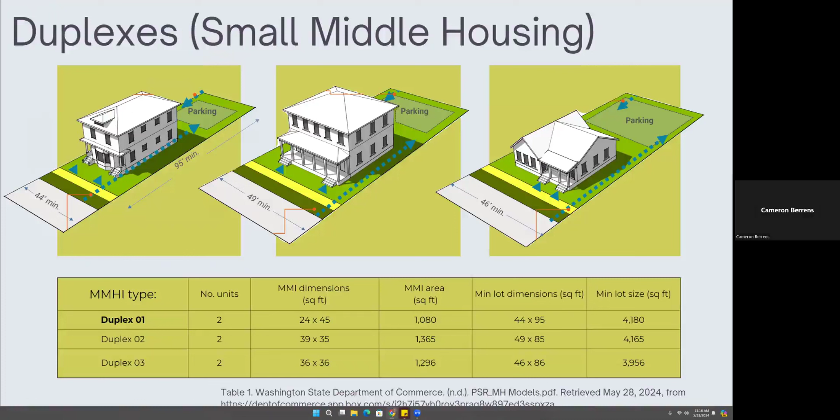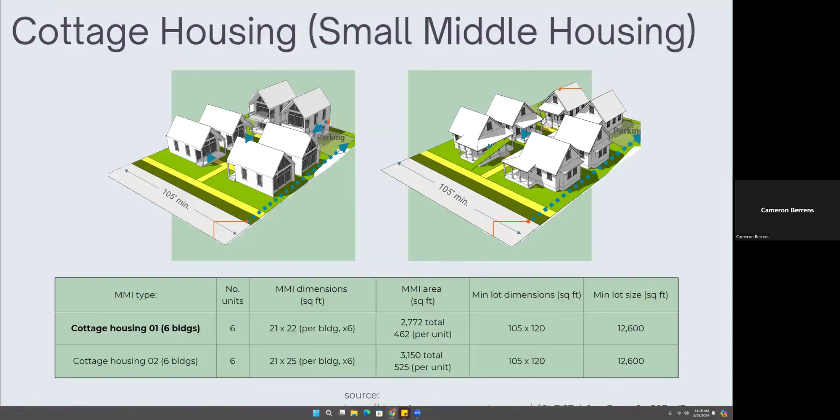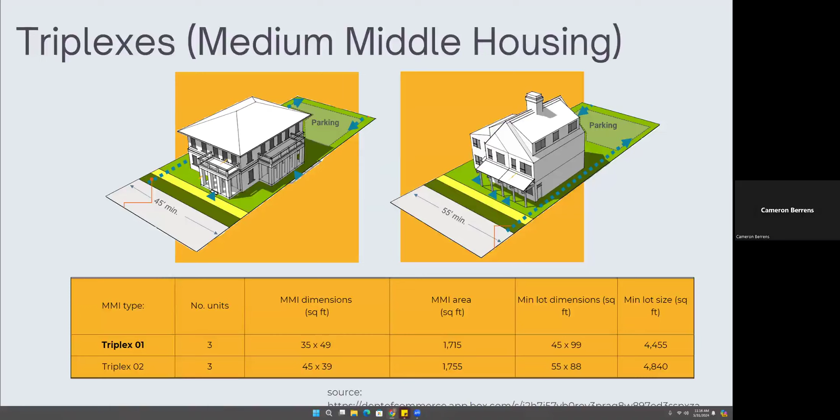We have cottage housing, which is usually a group of 6 or so homes, all on one lot. They are smaller buildings and are typically 1.5 stories tall and are arranged in this sort of style to allow for an inner courtyard. We have triplexes, which are 3 units side by side in a house-scaled building, but sometimes on the upper echelon of house size. These are 2.5 stories tall usually, so still within the Pacific County height limit.

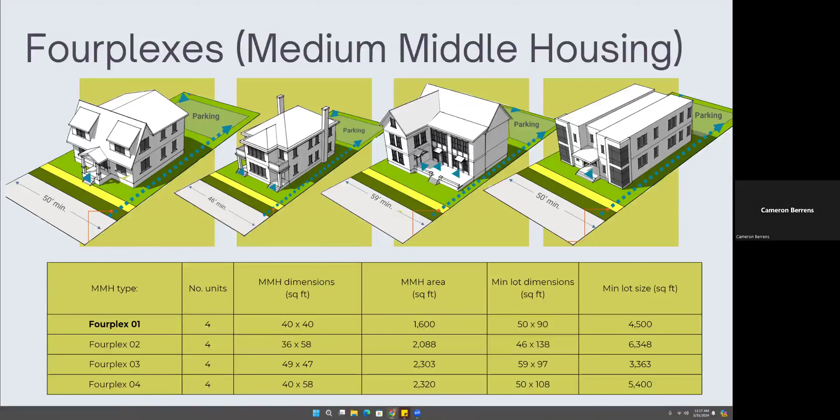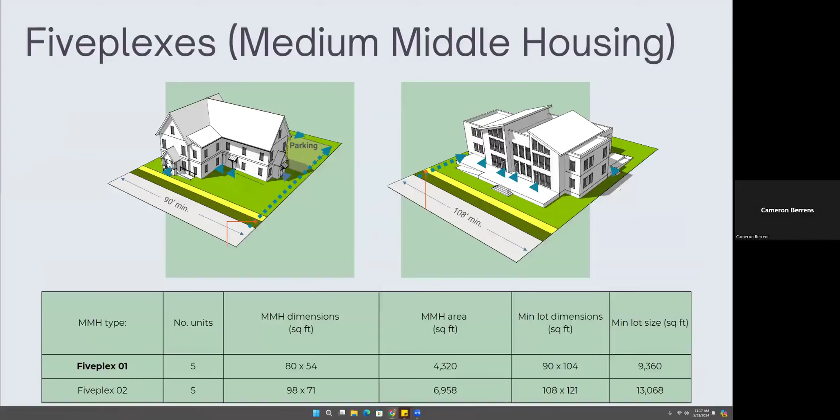We have fourplexes, which are just 4 housing units in a larger building. These also fit the 2.5 height requirements, usually 2.5 stories. And they're usually 2 on an upper floor and 2 on a lower floor; that's just how these are often laid out. We have 5plexes, which are a medium to large sized detached house consisting of 5 units within a single building. They are usually under 2.5 stories in height, and most have one entrance or two entrances, often facing the street. Sixplexes have 6 units and are a small to medium styled house, also under 2.5 stories in height.

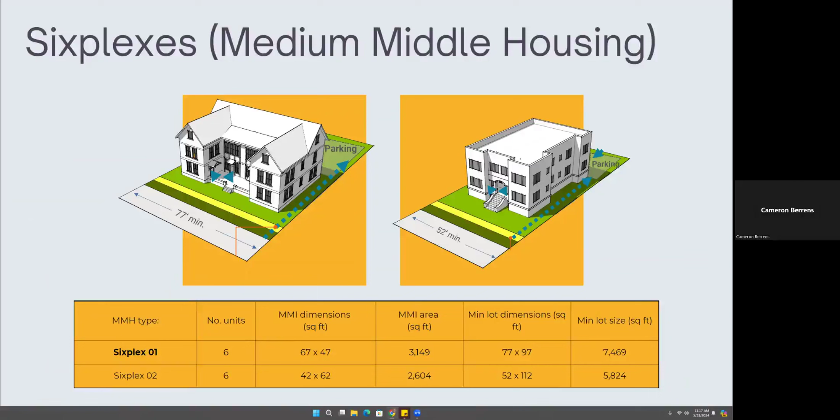We have courtyard housing, and this is where it changes up a little bit. They have a detached style, or these large styles on the right. The large style on the right is called Courtyard Housing 3, and it's actually not an option for Pacific County. It's too tall for the height limits based on the environmental concerns of the ground shifting and moving. This 3-story building is not really an option. But if environmental concerns or zoning were to change for some of these areas, then this could be an option, as Kelly and I discussed how there are the tall hotels in Long Beach, which are over the size limits of other zones.

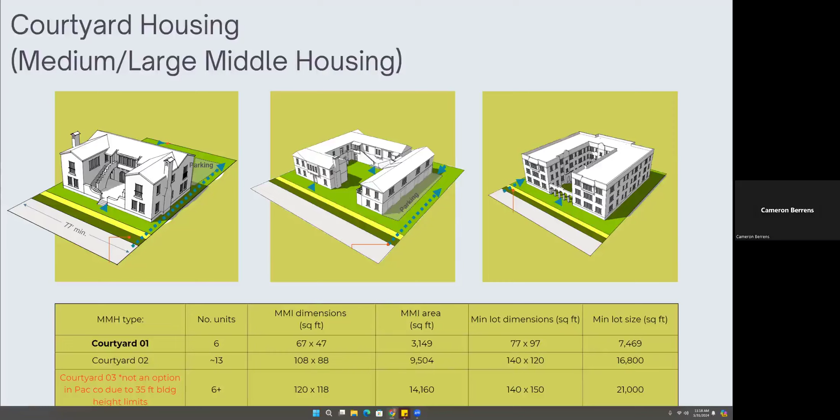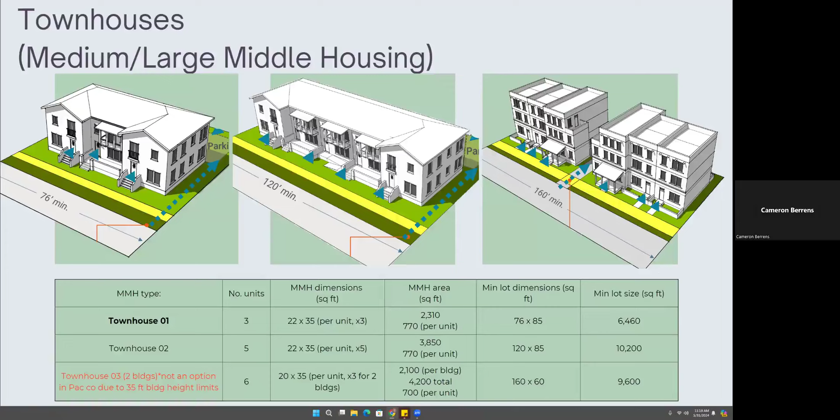And our last type is townhouses, which are a medium to large middle housing type, consisting of multiple units, and it can range from 3 to 5 to 6. This one on the right is technically 2 buildings on one parcel, and each building has 3 units inside of it. We are now going to go into our municipal recommendations, and we're going to start with Ilwaco.

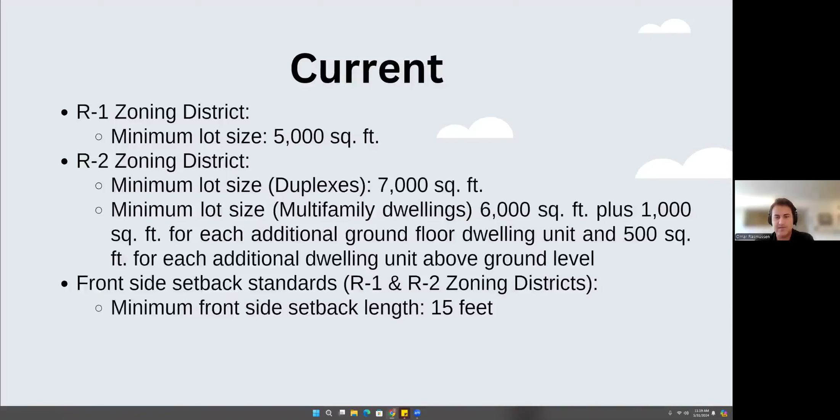All right, thank you, Cameron. Today, I will be going over the proposed zoning change recommendations for Ilwaco. Firstly, let's take a brief look at some of the current zoning guidelines in Ilwaco which affect infill housing implementation. In the R1 zoning district, we have a minimum lot size of 5,000 square feet. In the R2 zoning district, we have a minimum lot size of 7,000 square feet for duplexes. We also have a minimum lot size of 6,000 square feet for multifamily dwellings, plus an additional 1,000 square feet for each additional ground floor dwelling unit, and an additional 500 square feet for each additional dwelling unit above ground level. For front side setback standards, the R1 and R2 zoning districts both have a minimum front side setback of 15 feet.

Moving on to the recommended changes. We'll start with the R1 zoning district, where I propose that the minimum lot size be decreased from 5,000 square feet to 4,500 square feet in order to allow for increased housing capacity. In the R2 zoning district, I propose that the minimum lot size for duplexes be decreased from 7,000 to 6,000 square feet. I also propose that the base minimum lot size for multifamily dwellings be decreased from 6,000 to 5,000 square feet. I also recommend that the additional lot size minimum increase for additional ground floor dwelling units be decreased from 1,000 to 500 square feet. And finally, I recommend that the front side setback minimum be reduced from 15 to 10 feet. All these changes will allow for an increased amount of infill housing in Ilwaco, while also taking into consideration concerns about neighborhood character, primarily within the R1 zoning district.

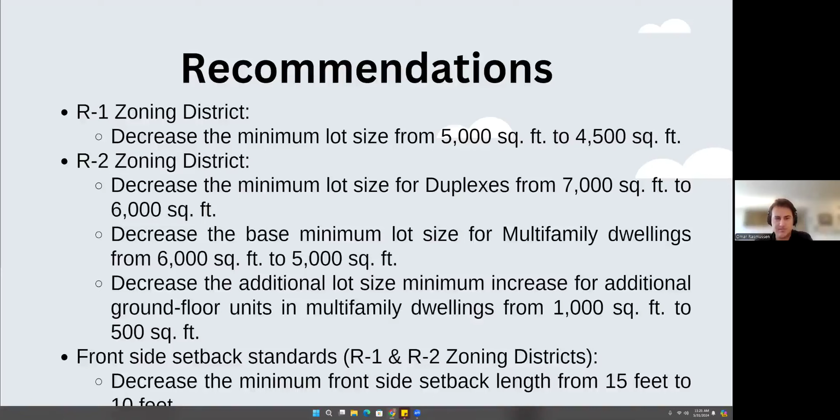You're now going to go over to Raymond. All right, I'll get into the state of Raymond. So I'll start off with some of the current zoning information as well as the other status of housing and parcels in Raymond. So Raymond has been a little bit more leeway in comparison to some of the other municipalities in terms of their density.

So in their most recent comprehensive plan, they made a goal to allow duplexes on lots of 6,000 square feet, which is down from, I believe it was either 7,500 or 7,000. And they also made a goal to allow multifamily on parcels of 10,000 square feet or larger. Also looking at some of the parcels that could potentially have infill housing.

In taking into account areas that have sewer, I was able to find about 86 residential vacant parcels based on the data that I added, as well as the parcels from the previous group's analysis. I found that sewer is not extended throughout the entirety of Raymond and the urban growth area. So there are some areas that if sewer was able to be extended to, there could potentially be more housing allowed.

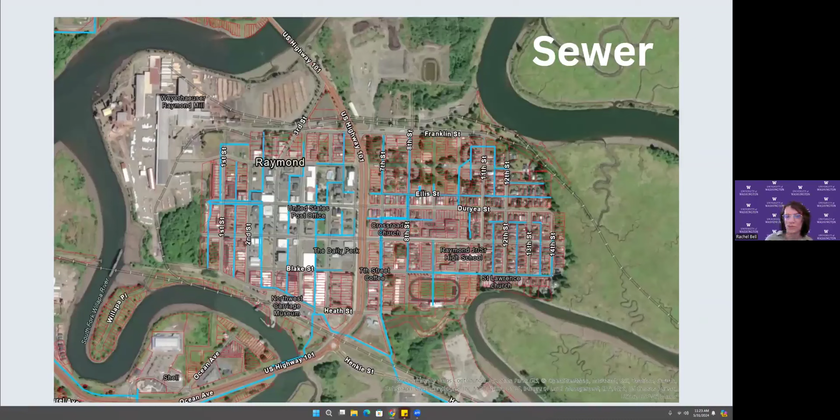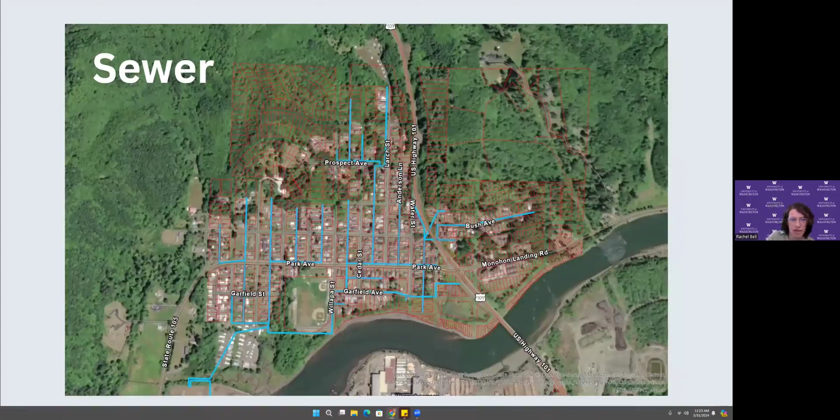All right. So next I looked at some of the vacant parcels that are connected to sewer or are close to the main sewer lines. So this is the central area of Raymond, and these are all parcels that I found to be within about 40 feet of sewer. So that's in that area. And then also I coded it by the size of the parcel. So the yellow is about 6,000 feet or under. The orange is 6,000 feet or over. And then red is over 10,000 feet.

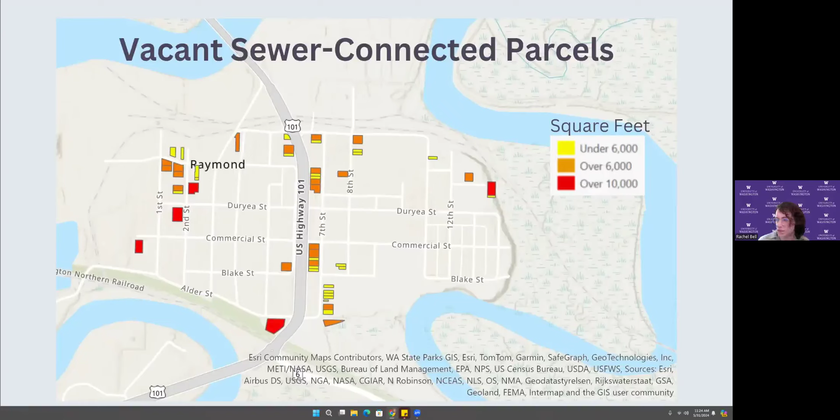So for part of my analysis, I just looked at a handful of parcels in Raymond to give some examples of what could potentially fit if the minimum lot sizes for multifamily homes were lowered a little bit. So for example, based on the example of middle housing measurements that we found earlier in the presentation, I found that some of these like triplexes and fourplexes could potentially fit on some of these parcels.

So for example, on the left here, I have the purple parcel and the number there is the square footage. So it's about 6,600 square feet, which is under what they would want to do currently; it would be allowed to have a single family home or a duplex. But based on the measurements of the triplex and fourplex examples, I found that they could fit on that parcel. And that's including side setbacks and roughly the front and rear setbacks as well.

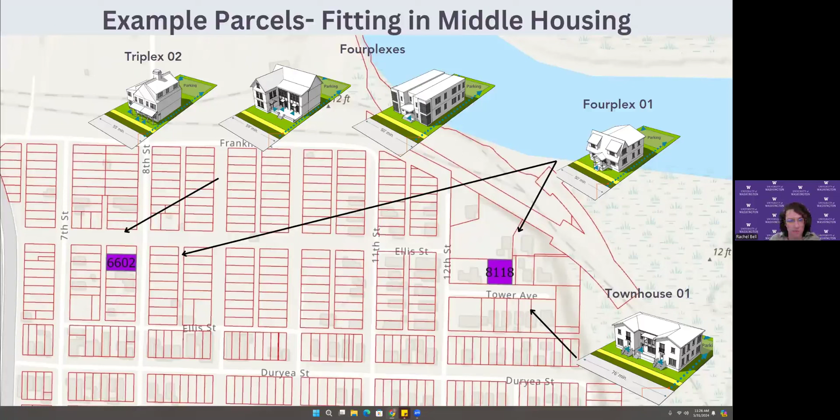All right, and then, so this is in the southwest area of Raymond. So these 2 smaller parcels, which are again about the size of what would fit a single family home or a duplex, could also fit triplexes or even fourplexes as well.

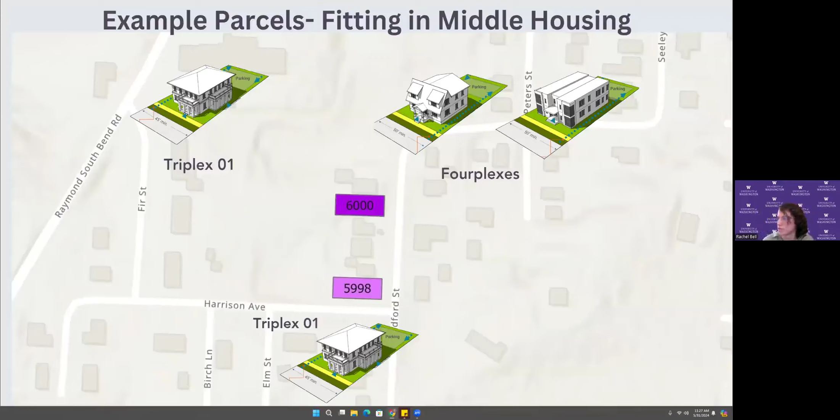All right, and then I'll get into some of my recommendations, and I will also get a little bit more detailed in my report. So for zoning, I would recommend to explore allowing triplexes and possibly even fourplexes on parcels that are less than 10,000 square feet, as long as setbacks and height requirements are met.

For setbacks, looking at some of the other municipalities in the county, I believe it was Long Beach and Ilwaco, you could reduce the front setback from what's currently 20 square feet to about 10 or 15 square feet to match some of the other municipalities and allow potentially a little bit more building area on there. And similarly, you could explore reducing the rear setbacks as well.

Also, which will be required by House Bill 1337, I would recommend starting to look into updating the ordinances in Raymond to allow up to 2 ADUs per lot. And then also looking into how you can extend utilities and roads and that sort of thing in order to allow and accommodate more housing in further areas of Raymond.

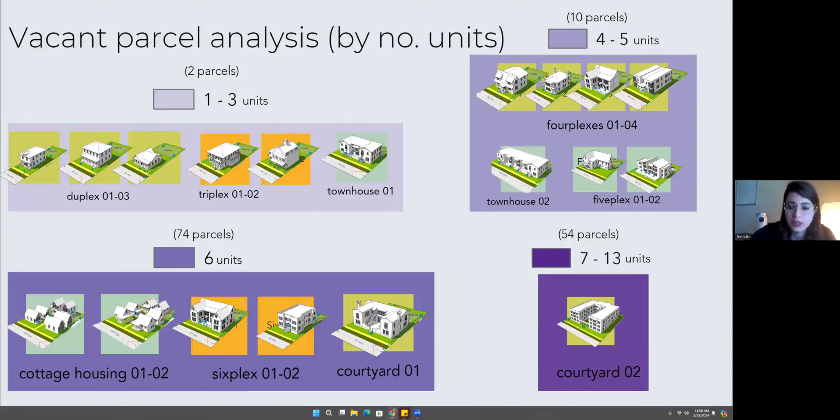And this next slide here breaks down those standard models which encapsulate those units. So in the 1 to 3 unit section, duplexes 1 through 3, triplexes 1 through 2, and townhouse 1 fits there. And those were the 2 parcels. So this slide, while it's a little complex, if you go back and forth between these slides, you can figure out what is able to fit in which vacant lot. All right, the next slide, please.

This shows where duplexes could physically fit but are not allowed either due to zoning, so they're not allowed in the downtown commercial, or due to the physical size restriction, so they don't fit, or the fit isn't allowed due to the minimum lot size or lot coverage. So from this, we see that 69 vacant parcels could fit a duplex but are not allowed. So this demonstrates the restrictive quality of some of South Bend's zoning currently.

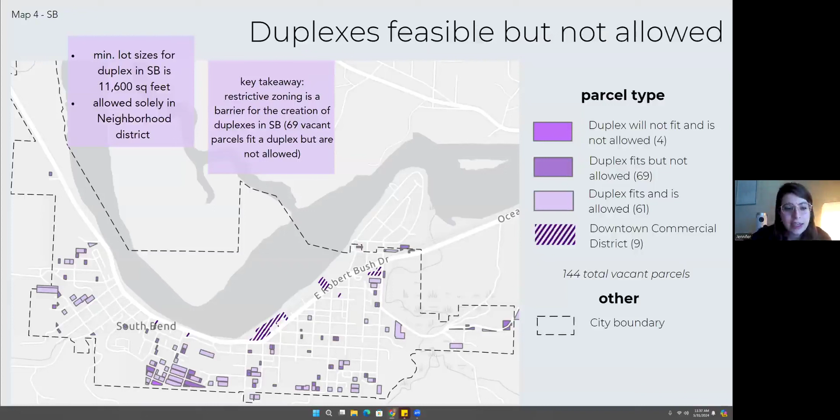And then the next slide is the same concept, but for multifamily housing. So from this, we find that current restrictive zoning is a barrier to multifamily housing as well in South Bend. And there are 97 parcels that could physically fit multifamily homes, but they're not allowed due to the minimum lot sizes in South Bend.

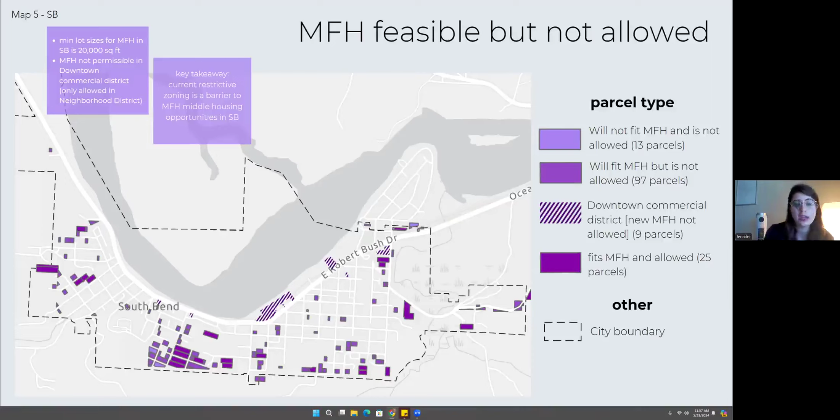All right, and this next slide shows the restrictive quality of each of the vacant parcels. So what is restricting them? So 69 of these parcels are restricted by their maximum lot coverage, and 75 are restricted by their physical dimensions. So from this, we see that maximum lot coverage is actually a very prohibitive factor of South Bend zoning code.

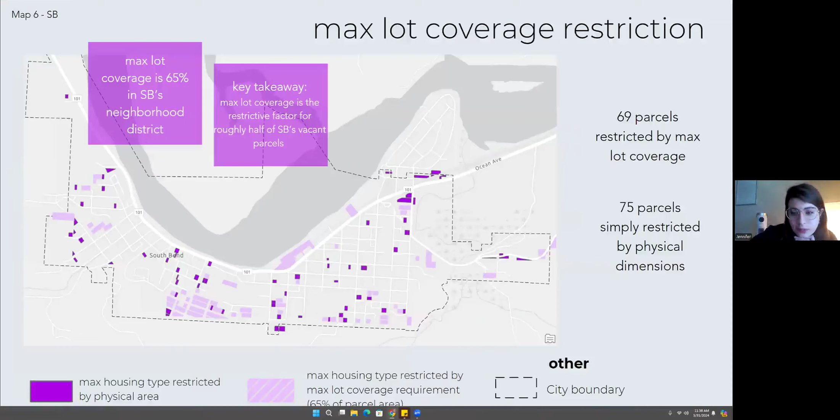And the next slide is a sewer map. So I've delineated all of the updated zoning for each parcel with their proximity to the sewer. So we see that 53 parcels are on the sewer, 40 are near the sewer, and 51 are far from the sewer. And so those 91 parcels that don't currently have sewer access but are vacant, that's a great opportunity for those sewer extension grants to then help make those parcels more viable for middle housing.

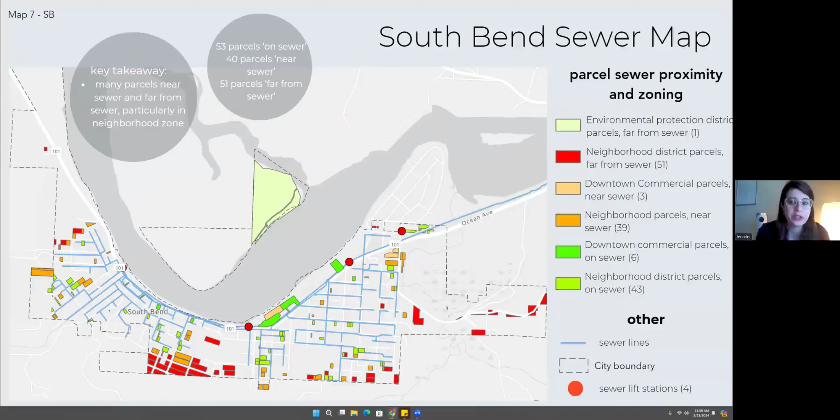All right, and then these next two maps are wetland analysis maps. So we take the wetland layer and we have figured out which of the vacant parcels in South Bend are affected by the wetlands. So there are 8 parcels that are affected by the wetland because they're within 25 feet, and 33 are within 300 feet of the wetland. And that's the minimum to the maximum buffers for a wetland in Washington. And since we don't know the exact categorization of each of the wetland types from 1 through 4, we did the minimum and the maximum buffer instead. And so from this, we see that only 41 of the 144 vacant parcels would be affected by the wetlands.

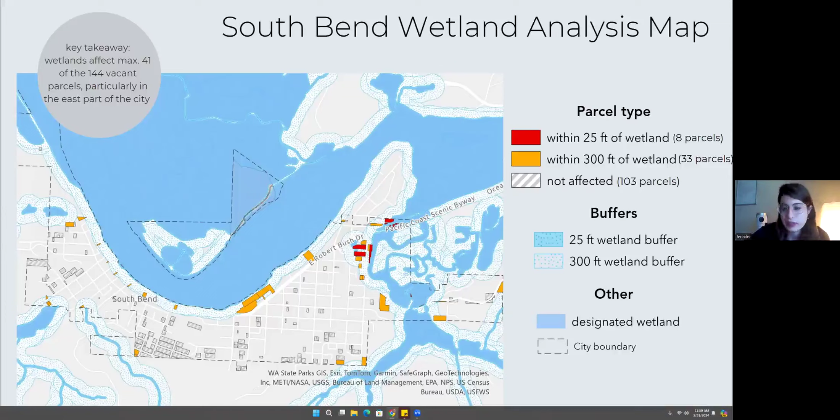All right, and so my recommendations to address these barriers in South Bend, the first one being decreasing the minimum lot sizes, so looking to Raymond and the Washington Department of Commerce standard minimum lot sizes from that table. We also recommend that South Bend extend sewer, and we will recommend some grants to do so with. Increasing the maximum lot coverage is also another recommendation for South Bend, as we saw that was restrictive in one of the maps.

Similar to Raymond, decreasing some of the front setbacks and other setbacks in South Bend would allow for more buildable parcel area and thus more middle housing types. Additionally, allowing new multifamily housing in the downtown commercial district, as I mentioned. An example of a city who has made this change is Sisters, Oregon. They've done the similar amendment.

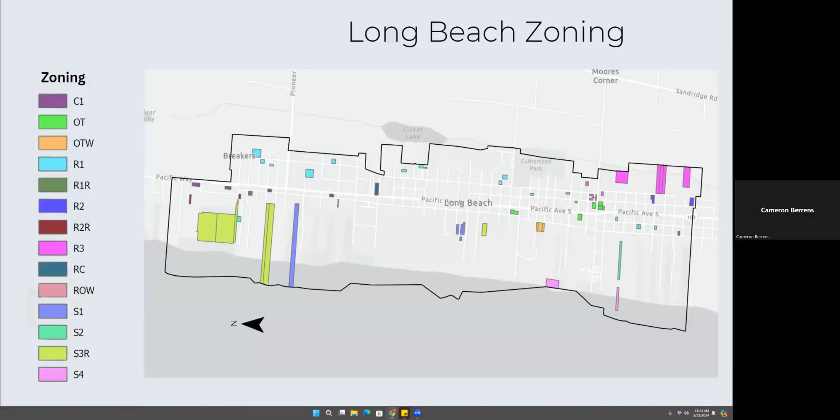Okay. So I started with wanting to know just what everything was zoned. I have the vacant parcels from the previous group, and so I just made a map going, okay, what zone is it? Put a color on it, put it on a map, just to figure out what are my options. From this, I broke down all the zones, and I looked at what's the allowed housing type in that zone. We got some zones that don't allow it. We got some zones that allow a quadplex, a single family home, duplex and lower.

And then hotels and motels, I think, count as a housing type, because we have housing types that are supporting tourism. And so I guess that counted as a home. And so my thought process behind that was, well, if it's a home over the weekend, you could rent some of the units out long term. And these parcels are these green ones on the left, and they are zoned as shoreline resort restricted.

And there's also live workspaces, which are in the Old Town and Old Town West district, which are located on the right side. I do have Long Beach turned on its side, which was interesting because I couldn't really fit Long Beach vertically on a horizontal slide. And so I just plopped Long Beach on its side. So we are looking at Long Beach from the beach, if that makes sense. The ocean is the gray below us.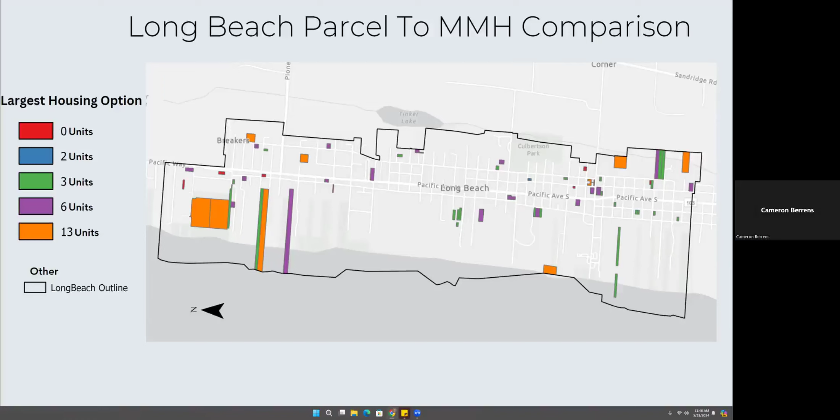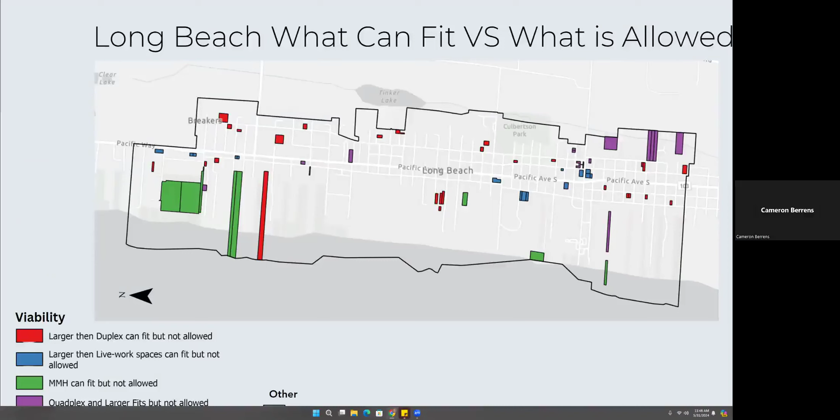This is just to see what can fit versus what's allowed. What does the zoning say? And what did that previous map have to tell me? We have parcels that will fit larger than a duplex, but just aren't allowed to fit a duplex. We have ones that can fit larger than a live workspace, but are just not allowed. We have ones that can fit any housing type, multiple housing types, that are not allowed. We have some that can fit a quadplex or larger, but are zoned for just quadplex and lower.

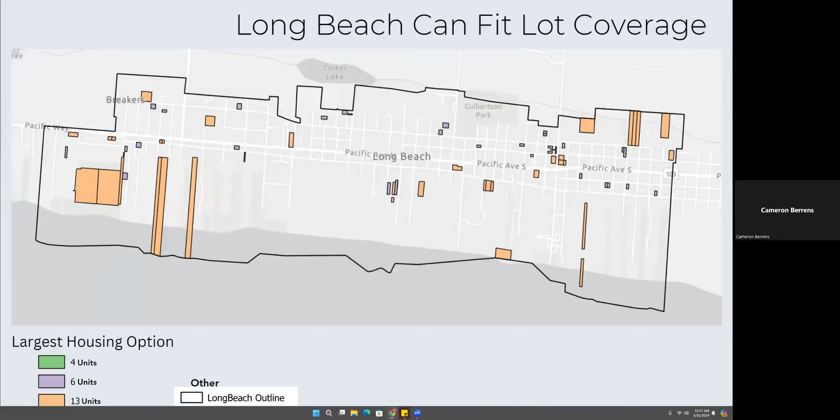This is a combination of the previous idea as well as the length and width, just to see a combination of both of them. If it met one of them, then what would it fit? And what was the highest capacity that a parcel could have? So a lot of them can have a duplex. That's fine. Well, how do I get the most bang for my area, the bang for my buck situation? So we have a lot that can fit a fourplex. A lot of them can fit a sixplex, and then a lot of them can fit the 13. So there's a high opportunity to fit larger housing units based on size alone.

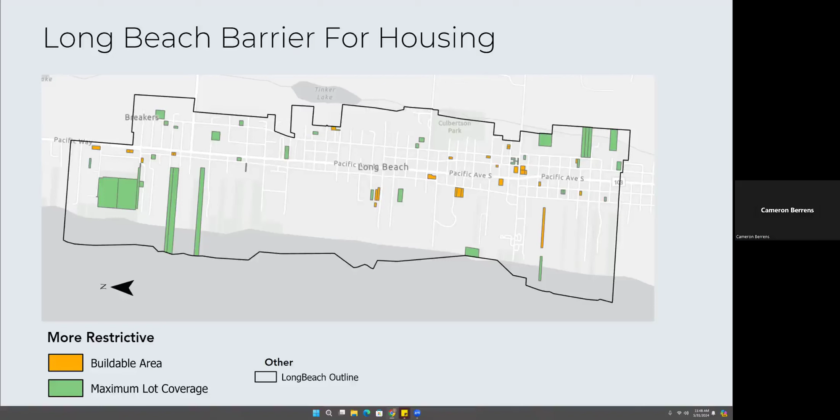This is a map determining what's more restrictive for that parcel. Is the buildable area, the length and width constraints, the problem, or is it the maximum lot coverage of what you're allowed? And so we have some parcels that fall in between, and for some of them the length and widths really just don't allow you to do things, and for some of them the maximum lot coverage just doesn't allow you to do things. So that's what this is trying to visualize.

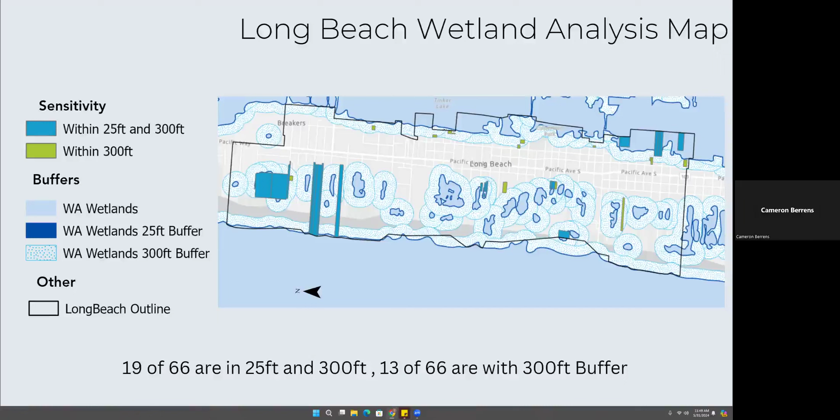And so what can be done is finding the actual categories of the wetlands, because we have this wetland designation, and that is from the Washington State wetland map that I found online, and I just imported that data and made a map and visualized it. But I don't know what the category is, because they have their categories based on the buffers that need to be had, and they just don't have that labeled as such.

We also have some parcels that just aren't affected by wetland. And so those would be the best parcels to be putting housing on, or changing something with wetlands, like being able to move them or resituate them and keep that land. So that could be done on some of these parcels that are affected by that wetland.

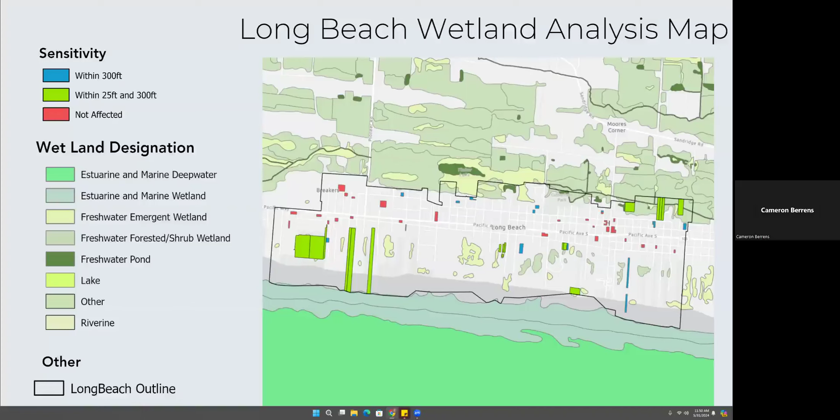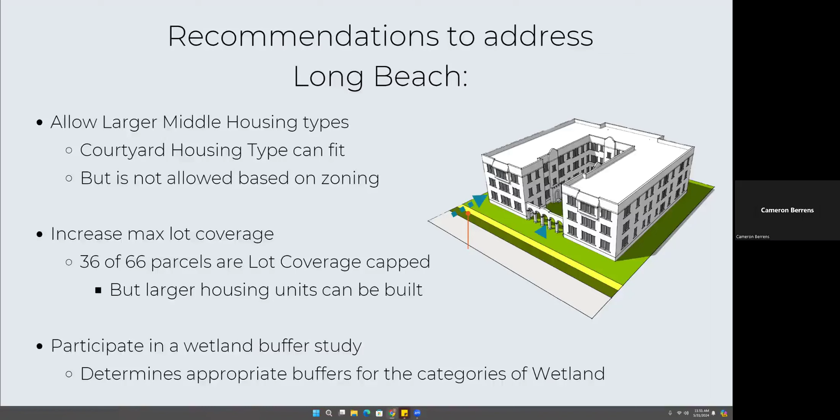We can increase the maximum lot coverage. We're sitting at 65 to 75 on most zones, which I think is good, but I think you could increase it like 5% more and just add a little bit more coverage, and therefore adding another unit, another housing type. That wetlands buffer study could be done to figure out what category the wetland falls under, and to then give the approximate and appropriate buffer length.

My other idea was to add duplexes into single family residential, as well as the single family restricted, because they are currently not allowed. To allow triplexes within the 2-family residential and 2-family restricted zoning, as well as add 5plexes and 6plexes into the multifamily and multifamily restricted, because those are currently capped at quadplexes.

Now I'm going to open the floor to any questions, if anybody has any, and I can go back to the appropriate slide if you wish. I do have a question. In our current shoreline and recreational areas, long-term housing is not allowed, and Ariel will correct me on this because I always get these things a little wrong. But were those kinds of restrictions considered when you looked at your total housing availability?

I did see the shoreline ones. You're talking about like the shoreline 1, shoreline 2 zoning. Yeah, and I don't know if Ariel's able to jump in and save me on this one, or David. I'm here. Thank you. Yeah, bail me out. You know what I'm talking about. So S1 and S2, yeah, single family and two family. He was focused more on the S3, S3R, which is resort only, vacation rental only, not allowing for long-term housing.

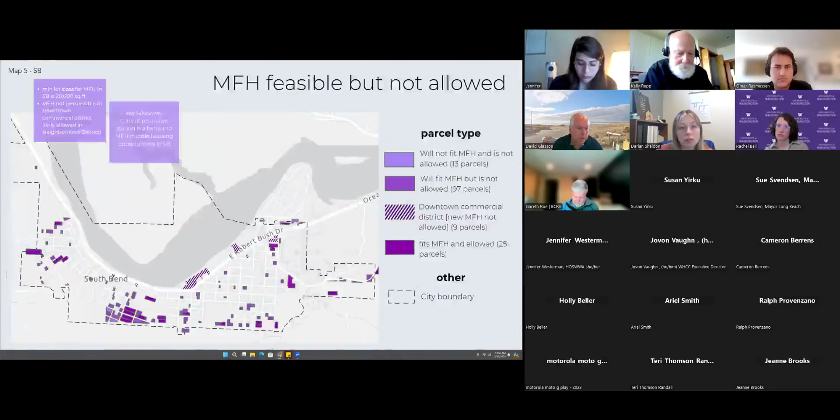You know, I was looking at what Rachel did on one of the slides. There was a building, I think it was 8,228 square feet on her lot. And what I was seeing is there's a building underneath it. And that one, A250, the one you were on. So if you look at that A250, there's already a building under there.

And what happens in Pacific County a lot is the adjoining property, it says it's vacant, but it's actually owned by the person with the building, and that's part of their lot. They just own 2 lots. And so some of these that they're showing as vacant are really not vacant. But it's good to have that inventory, there's no doubt.

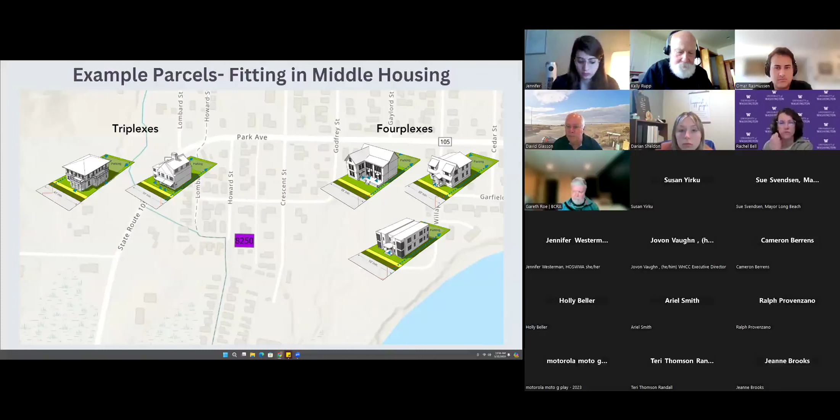On Raymond, again with Rachel, she had the setbacks and they brought them down, I think, to 10 or 15, and she had square foot. I think you mean a frontage of 10 feet, not square feet, because that'd be like a 2x5. Oh, yes. Yeah, I'm sorry. That's what I meant. No, I'm just thinking this will come out eventually, and it was just something I wanted to make sure I was understanding, because boy, that was really small to me.

And then Jennifer, the question I had is, on yours, you were talking about more or less making everything a bedroom community in South Bend. And they have problems funding police, fire, parks, all things that go with it because there's no commercial revenue to come through. So I'm guessing South Bend would probably feel that they would need the commercial. They're looking for that big thing to employ the people that are going to live there. And that's a problem that I see. And again, they're with transit as well. So that would be a thing.

I didn't think Miami was a good comparison. You know, Miami's got an incredible commercial scene. I mean, we even know about Miami and Long Beach. And I don't know that those two mix as well.

And then Cameron, the notes I had on yours for Long Beach was the area that you had west of the Breakers. It's owned by the Breakers. Yeah, either one of those work. The big blue blob on the very left corner of that is when you have an oceanfront lot and you've built on it in the 70s or 80s. A lot of times people don't want to build or sell in front of them because they have their ocean view or they don't want anything built on it. So some of these lots, even though they're big lots, you're not going to see them developed. I don't know how you could force that to happen.